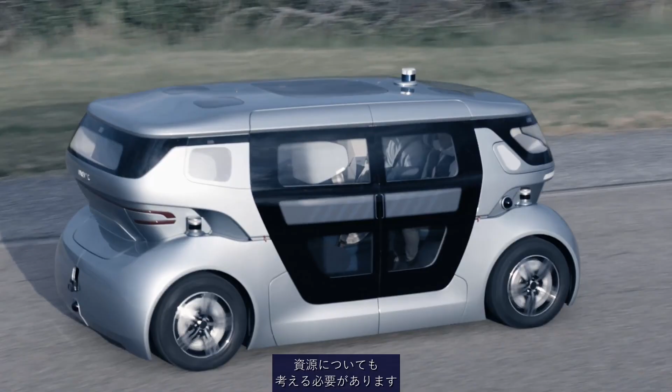We want to improve our quality of life, but we need to decouple that from our use of resources. And therefore, autonomous vehicles are really an option to make people share vehicles and use our resources more efficiently. Instead of selling a product, the vehicle, we develop a mobility service that is based on fully autonomous vehicles.

People like the comfort, the flexibility and the privacy of their own car. And in order to replace the privately owned car with a mobility service, we need to address those needs. We are aiming for using a custom-built AD vehicle that is really designed for this new business case of sharing rides with strangers. Our simulations say that one Sango vehicle can replace 5 to 10 privately owned cars.

The more problems a city has with congestion and parking, the better for our solution. Our intention is that this will become a reality in 2024, and it will cost less than half of what it costs to own a car.

The business model and how we operate the service needs to be coupled to the technical development. Whenever we find out that something is difficult technically, we need to take that into account in our business case. And for us, the simulation environment is just a perfect way of doing that.

We really need to keep track of the digital twin. So for every vehicle out there, we need to have the data in our systems. We need to know exactly what's in each vehicle. So even from the concept phase, where we put the requirements on our product, to the end phase when it's leaving the production line and going out to the customers, and even when the customers are using it, we need to keep track of the digital twin.

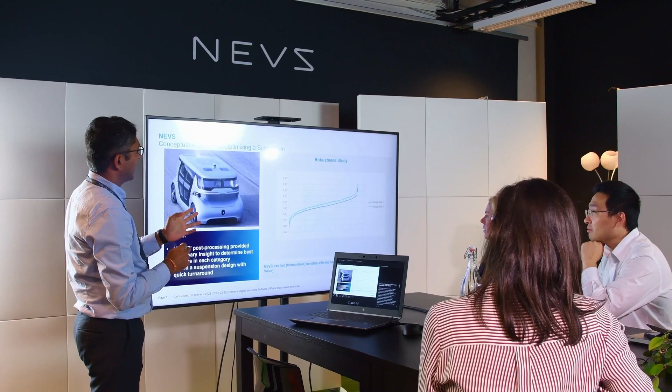Our vision was to move the CAE world closer to the CAD world, closer to Teamcenter in this case. That's why we stepped into the Simcenter world when it comes to CAE, and we approached Siemens, and they were up for the partnership. And together we have developed it.

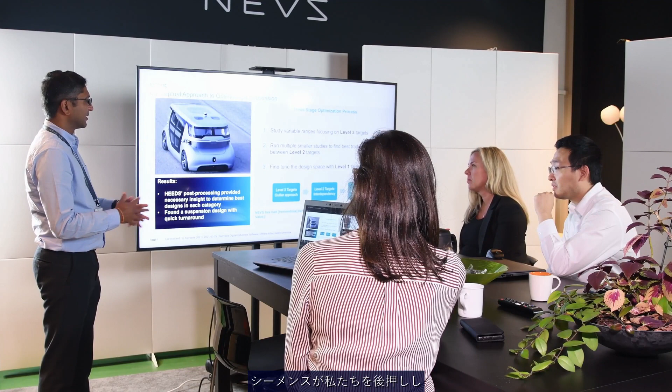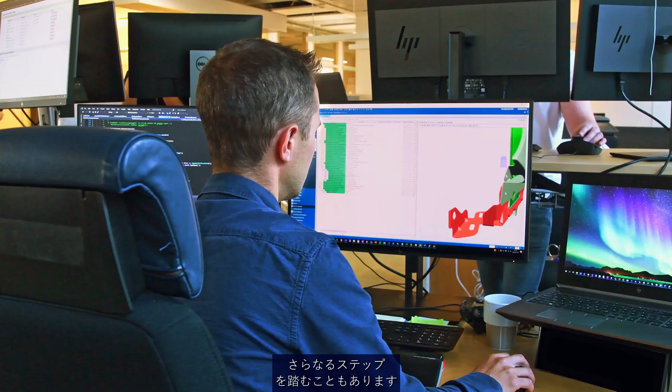So in some areas, Siemens have pushed us to improve and step into the new era of simulation. And in some cases, we have actually been the one pushing Siemens, taking even further steps towards the digital thread and traceability.

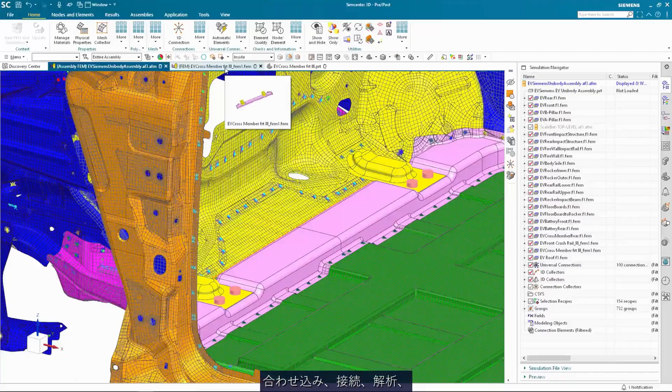We've been working very intensively with the Siemens team, and we try to develop a process with traceability. From the CAD model, we take that from Teamcenter, and then we do the meshing, and then we do the connection, and then we do the analysis, and then we do the post-processing, and we do the reporting. And we want to develop a process with digital thread, so we can know at a certain point the model is related to the CAD design and so on and so forth.

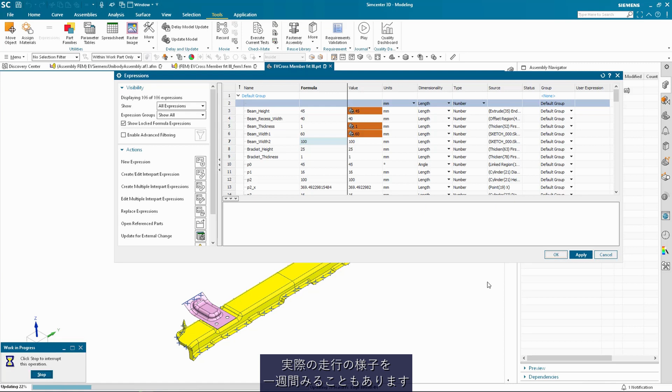We always do a lot of iterations from day one until you can actually see the vehicle on the road. So every iteration, we probably would run a simulation now. And that type of traceability from the design to the simulation for each iteration is vital actually. We need to make that traceability so we know the actual simulation results are reflecting the current design. Otherwise, we're not doing the right stuff.

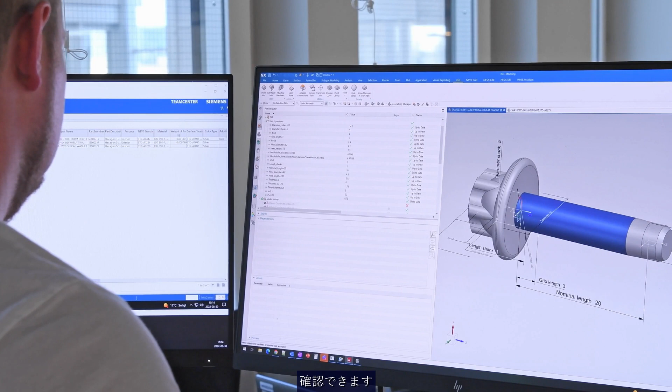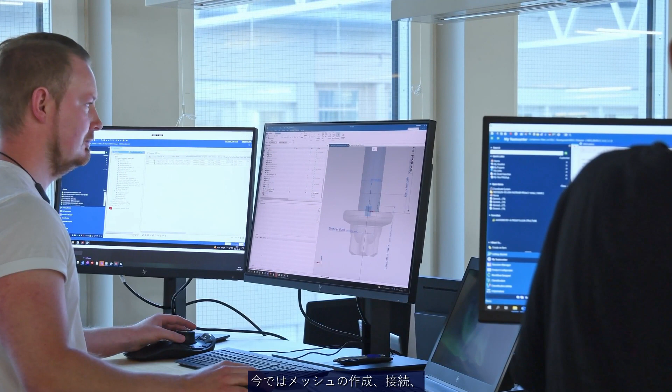The CAE engineers are working in the Teamcenter environment. So one very big advantage is time saving and quality assurance. Before we had a lot of manual repetitive work, and that has been changed. The meshing and the connections, etc. are automated now. Totally different speed in responding with CAE results back to the engineers developing the vehicle.

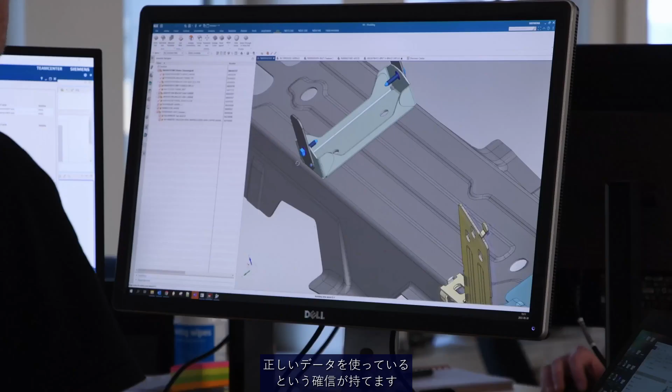It's crucial to get the products out on the market quite fast, and that requires that we have fast tools when developing the vehicle. When you need to do a new assessment, you can actually reuse quite a lot. It's already existing in the database, and you can feel confident that you're using the correct data. Everything is very transparent and open for the rest of the organization.

The simulation environment is really the magic key to unlock many of those problems. It's not that you just magically have the solution, but it's at least a tool for how you can iterate towards a better and better solution.